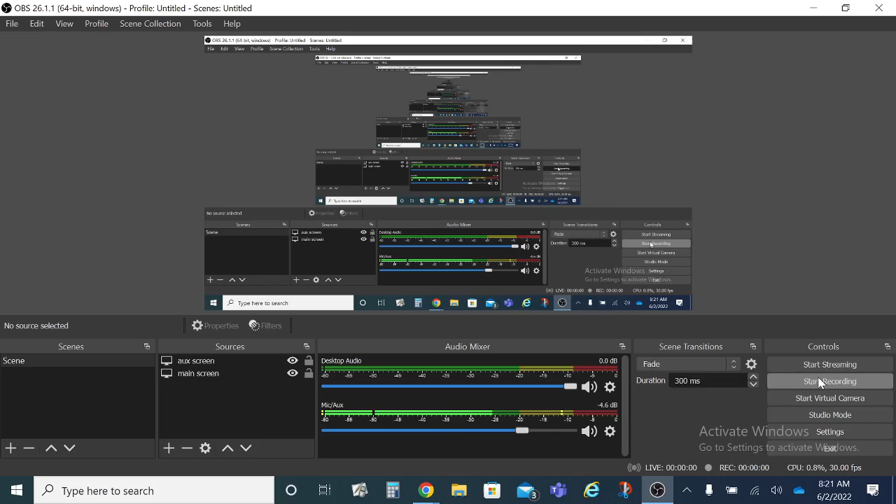All right, so what I'm going to do is first I want to talk to you guys a little bit about the actual caster, and I want to show you guys how to do a working drawing for it.

So let me just find our class, and what I'm going to do is I'm going to go ahead and create a document. I'm just going to call... well actually, let me cancel that because I actually do have a document already here.

All right, so what I'm going to do is I'm going to show you guys how to do the actual working drawing and how to make sure that you get the logo and all that stuff into it. First thing I'm going to do is I'm just going to obviously pick what I want. In this case, my drawing, is it in inches or is it in metric?

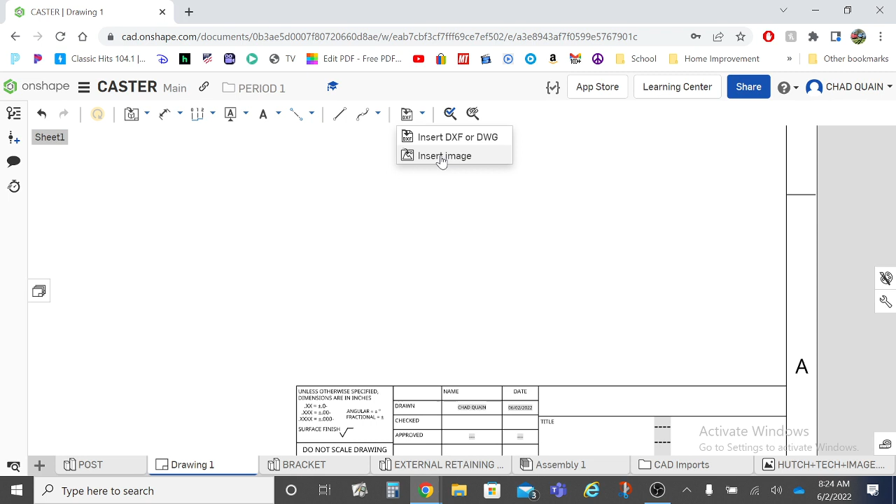From here, what I'm going to do is I'm going to show you guys how to put in your logo. So at the top of your screen, you're going to see where it says insert DXF or DWG, and there's a little drop down to it. The next thing that says is insert image. I'm going to click on insert image.

Now this only works if you see the Hutch Tech logo already imported into your drawing. If you don't, well then you got to go about it a whole different manner, and I'm not going to get into that. So you will see the Hutch Tech logo right here. I am going to go ahead and left click on it.

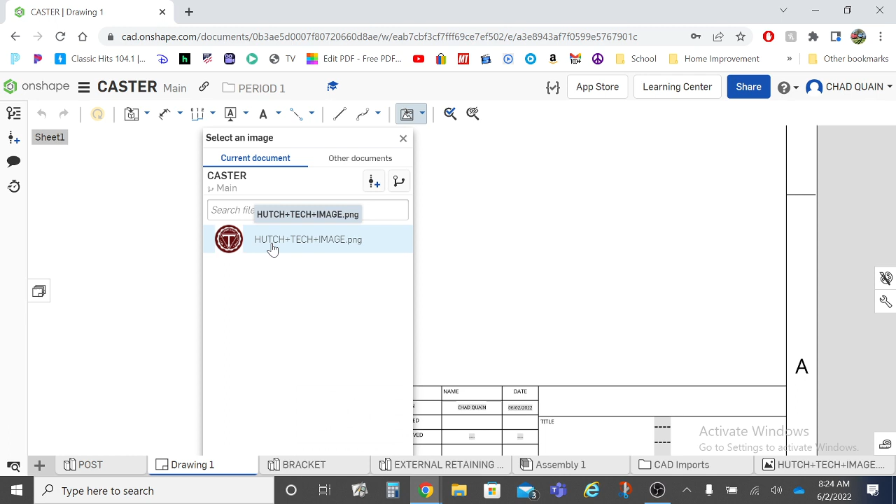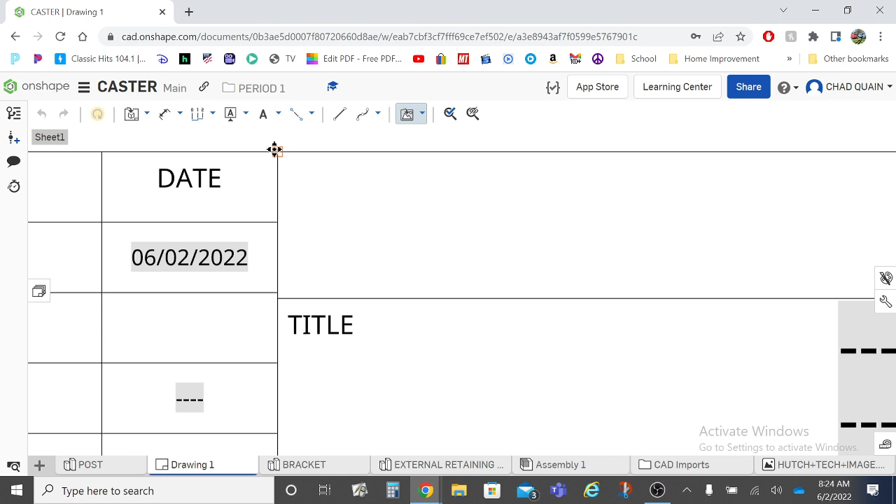The computer is now asking me to give it a start point. What I'm going to do is zoom in on this work area right here. I do not want to snap it to a corner. I want it inset a little bit. Left click one time, stretch your object out.

Don't let it snap to anything. It doesn't matter if it's centered right now. Left click again. You now have the object placed.

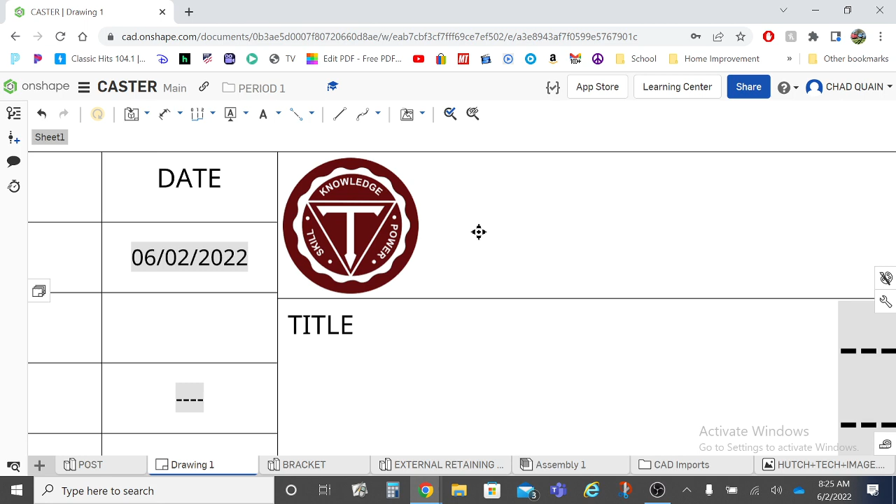All right, thank you. Now that you have your image imported, next thing that we're going to do is we're going to make a copy of it.

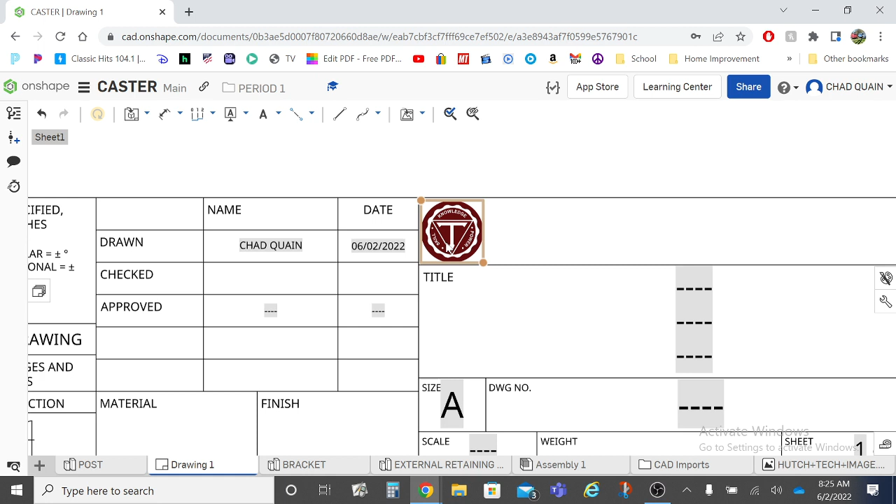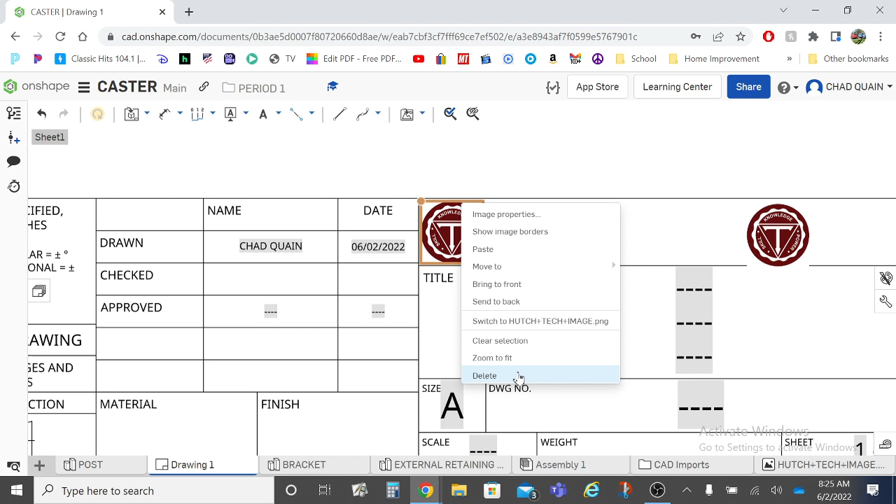Copying it is super easy, right click... actually, I lied. Copy it is Control C, Control V. I don't think it shows up as - we don't have a right click option to do a copy. We have right click to paste it, but I don't know why it doesn't show up as right click to copy it.

Once you have it copied, go ahead, we don't want both of them selected, we only want one of them selected. Place it over on the other side - you're just kind of eyeballing it, that's all you're doing. From here, you're going to place a note.

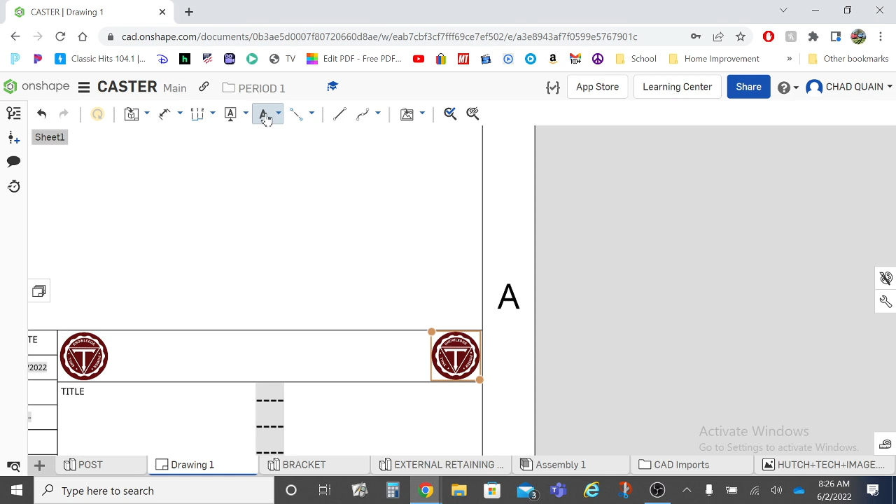That note is just going to be some text. Again, we don't want it to snap - if we can avoid it, we're going to try to avoid it. You're going to go ahead, type in Hutchinson Technical High School.

Before I do that, I'm going to go ahead and change the color to something that's more maroony. I don't know, we'll go with this color here. I guess this bottom one looks more maroony to me.

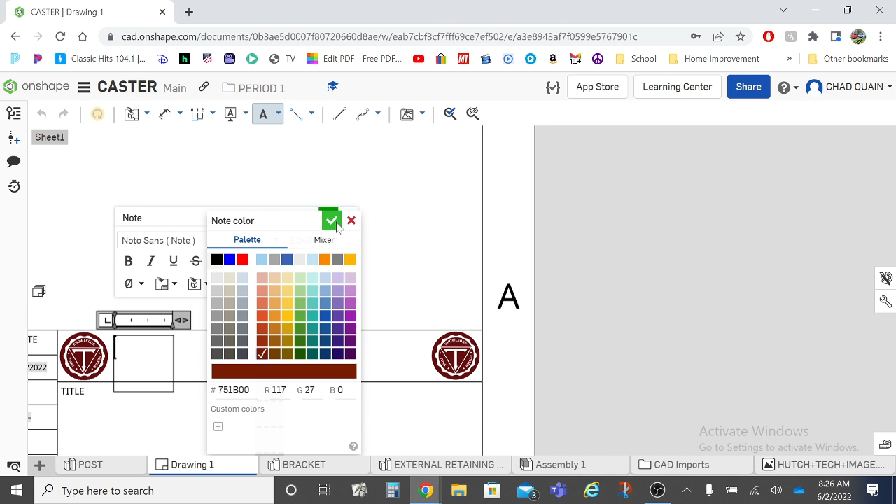I can then, in all capitals - you will notice that I've got a problem here that my text won't fit all the way across. Just go ahead, grab the push pull, stretch it out.

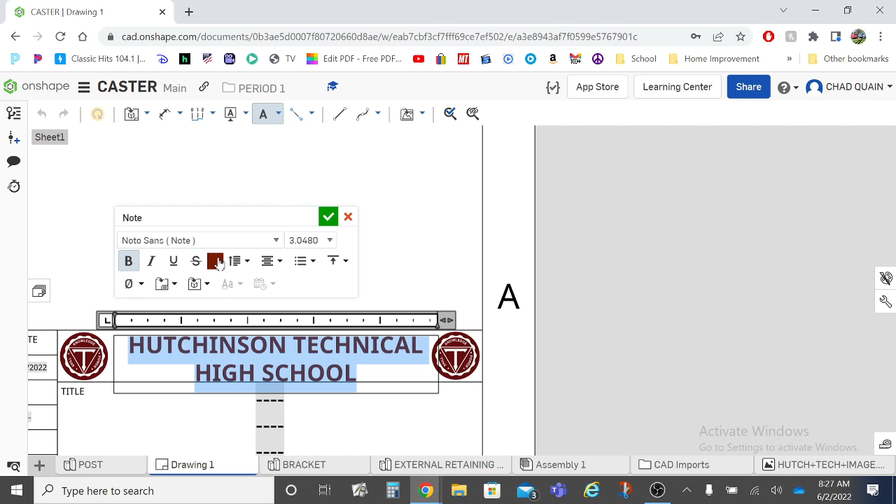Again, we center our text, so use the center tool. You can also make it bold if you'd like, but make sure that you select all of your text if you want to apply bold. If you want to change the font, you have to have it all selected. If you change the font to a different font and it does not fit into your title block, then and only then would you modify your actual text height.

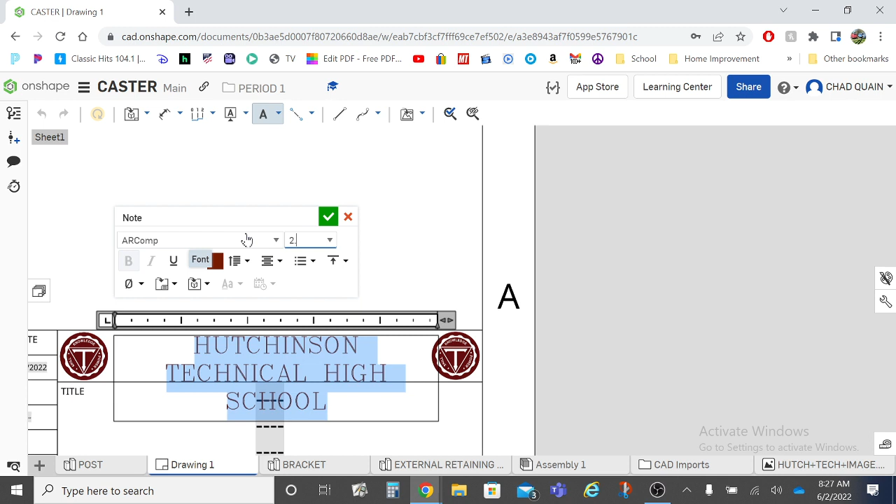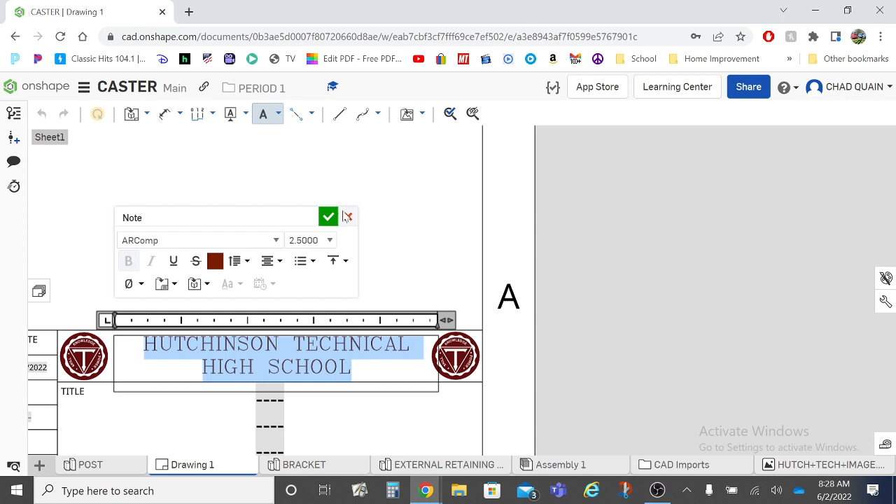Maybe I'd have to change this to like 2.5. There we go, 2.5 fits nicely. Could I mess around with it and make it bigger? Maybe. Could I mess around and make it smaller? Sure. Am I going to waste time doing it? Absolutely not. Does it really matter? No. Okay, green check mark it when you're all happy with it.

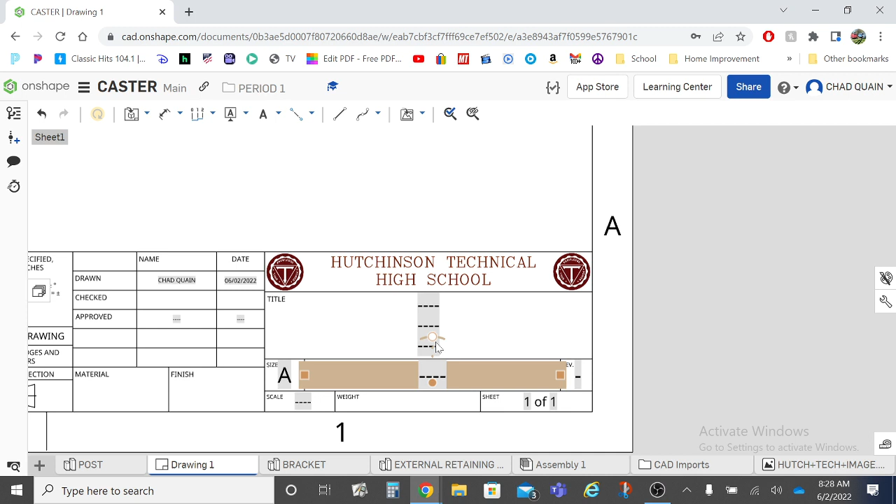Everything else in the title block. Putting the title in, make sure that you find the space that you want. Double click on that. Any of these other dashes that you don't need, simply select them and delete them. Will they show up in the final if they are left in there? No, they won't show up when you do a PDF, but is it annoying to look at?

Absolutely. Make sure you change your sheet numbers to represent what item you are working on of however many sheets there are. There are 6 sheets in total. So right off the bat, you're going to change this number from 1 of 1 to 1 of 6 or 2 of 6, whatever that number needs to be.

Scale. This should automatically be updated for you. If for some reason it doesn't automatically update, this is where you're going to change it.

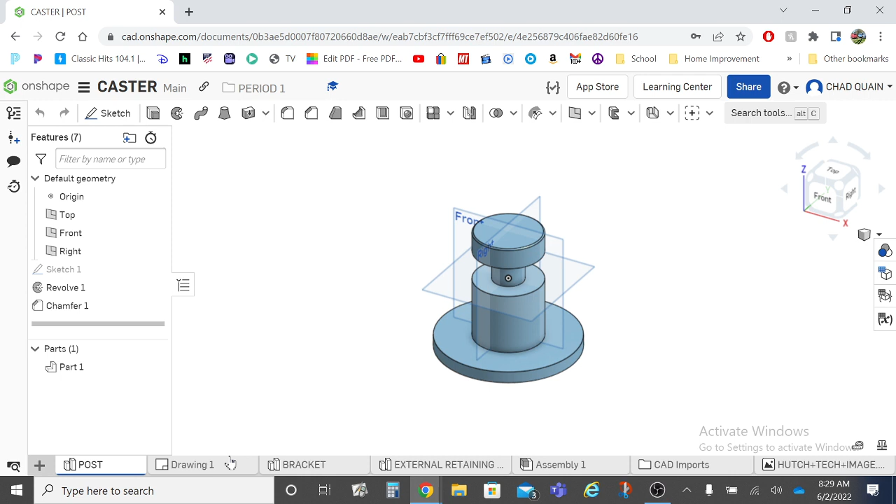The weight. This is something that I need you guys to fill out. You are going to be actually typing in what the weight of your object is. So if I look at, let's say, my post, what I would do is I'd select on my part, and then I'd come down to my display mass.

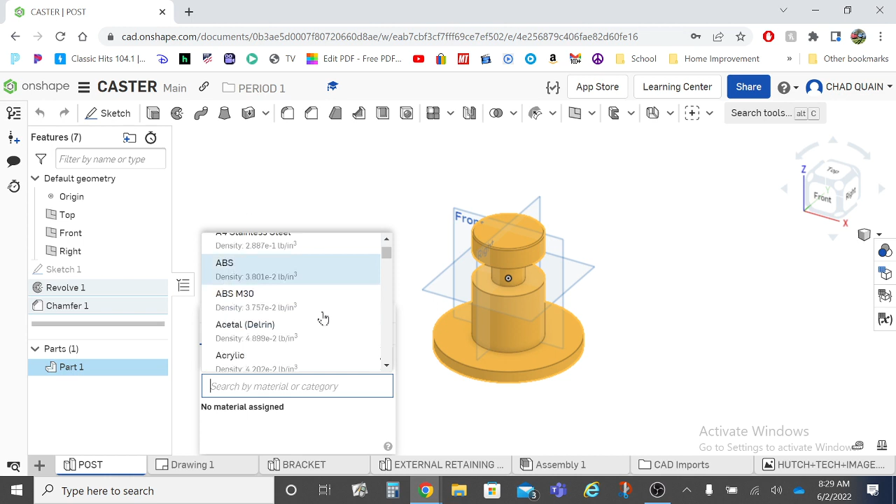I need to make sure that I actually have an item selected for it. In this case, I don't have anything selected, so I have to come back in here, do my right click, assign material, and then I think it was cold rolled or cast? I don't know, what is it? Steel? Anybody? Carbon steel, is that what it was? No, if it's not, that's what I'm going to use for this demo.

Come back to my weights, and then I will see where it says what my mass is. Make sure that you follow the instructions. If the mass is supposed to be in ounces, make sure you come up to your hamburger workspace units and you change it so that it represents the proper units. If it's supposed to be ounces, kilograms, grams, whatever it's supposed to be, make sure you change that. It tells you in the instructions what it's supposed to be.

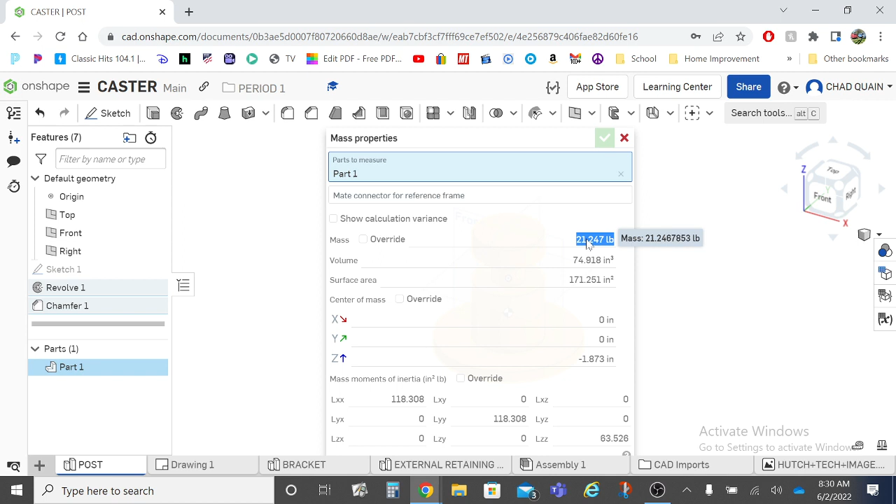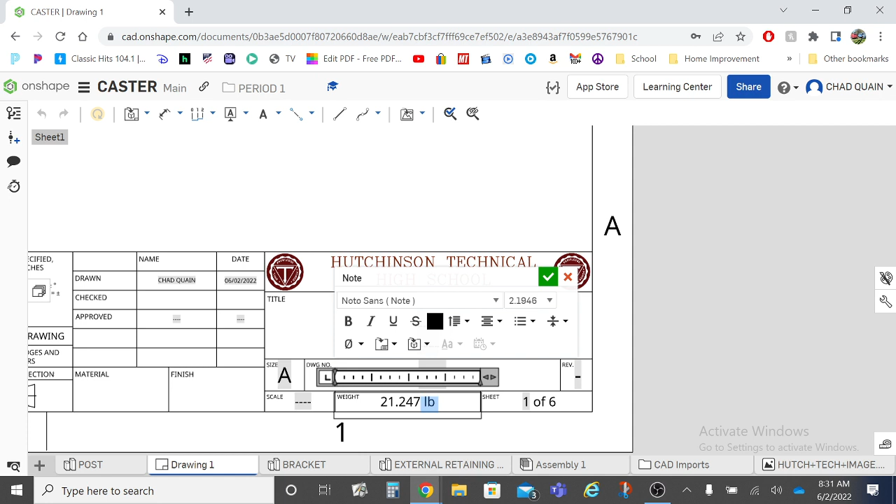You could then simply just copy and paste. Control C, come over to my working drawing, come over here, double click, Control V. There it is. This also would be the same thing that you would go ahead and type into your mass calculations quiz. The only thing is I don't want you to include the space or the units because it's already indicated on the quiz. I only want the raw number value, 3 digits, or 3 decimal places, okay?

Material is told to you in the actual working drawings or the detail drawings. So if I come over to my detail drawing here and I look at, I don't know, I'll just pick one of them randomly. You can see it says carbon steel, it says powder coat, and then it has a powder coat color to it. Sometimes it will say that it is polished, sometimes it will say that it is raw, whatever it is, make sure you fill that out.

The information that you see in the title block is basically what I want to see on your final project. If you're missing something, well, then that's going to be points off. If I miss something on here, let's say I miss a crucial dimension.

If I don't have it on here, guess what? I'm not going to take off on it for your project. I know on one of the objects I have it where I believe I missed a chamfer, so I'm not going to take off for that. But if you come up to me and ask where's that chamfer, I'll tell you it's on page 2 of the project. That being said, this is all the information you would need for your title block.

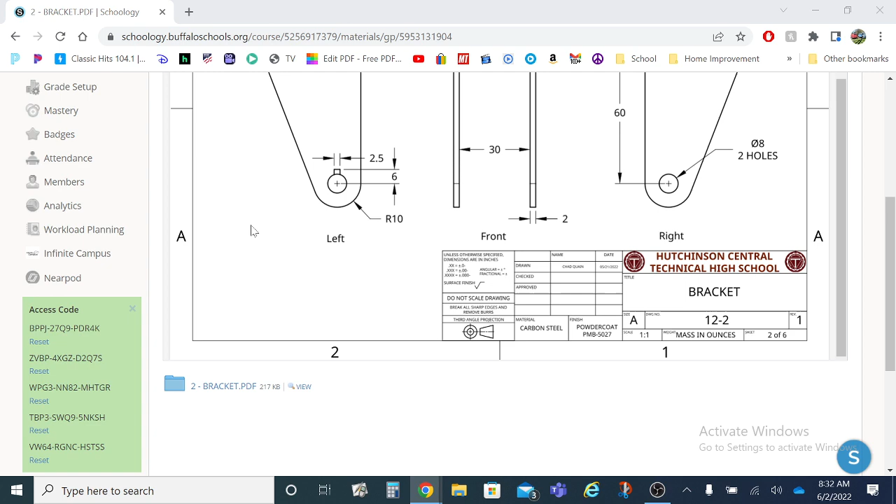Next, moving forward, I'm going to go ahead and use the insert view, pick an object that I want to work off of. I'm going to use the bracket. So I'm just going to go ahead and pick bracket, place the bracket, and place the multiple views of it.

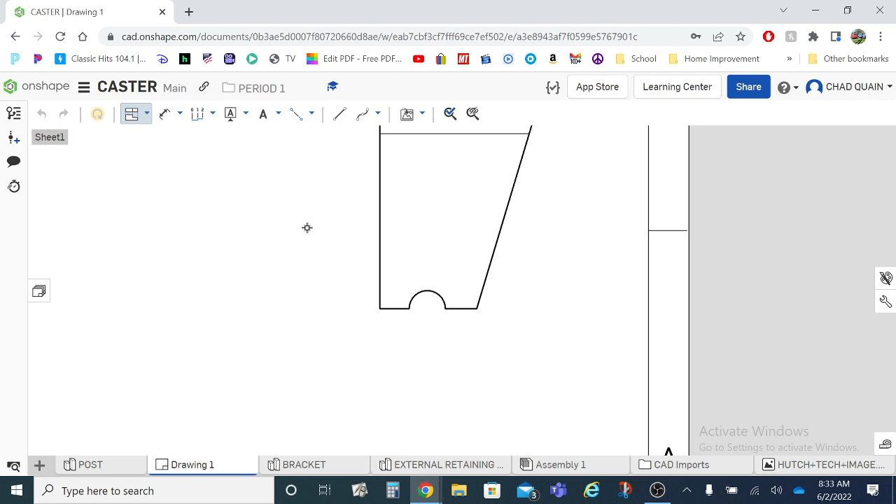Obviously, you can see my bracket is not complete, but it gives you the idea as to what you need to do to it. You will notice there is no information written underneath my bracket, meaning it doesn't tell you what the front view is, the side view, or anything like that. If I right-click while having my object selected...

I can go View Properties. I can then click on the View Label. I can also go ahead and click Scale Label, and it'll tell me what the scale is. Again, information that you see on the worksheets, you also need to have that.

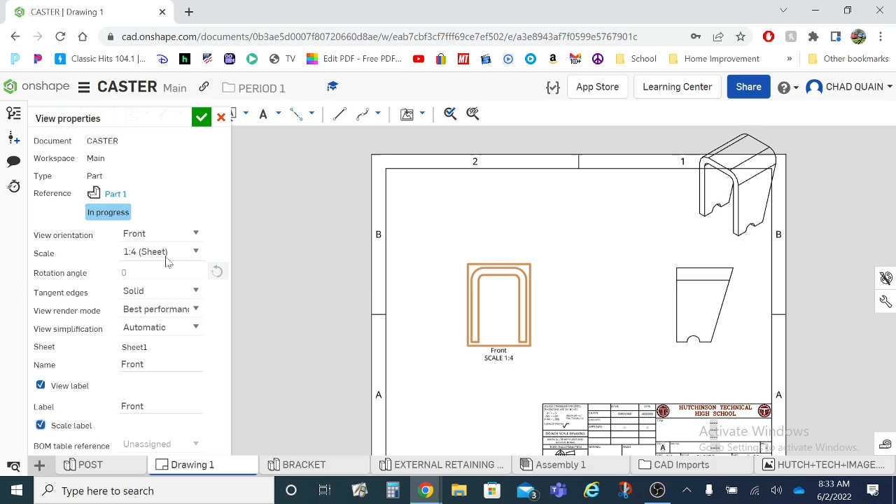If I need to change the size of the drawing, I can change the size of the drawing. I'm just going to put it 1:1. I don't know if that's the right scale. Clearly, it's not going to fit on here, so I'm just going to go back to that 1:4 for now.

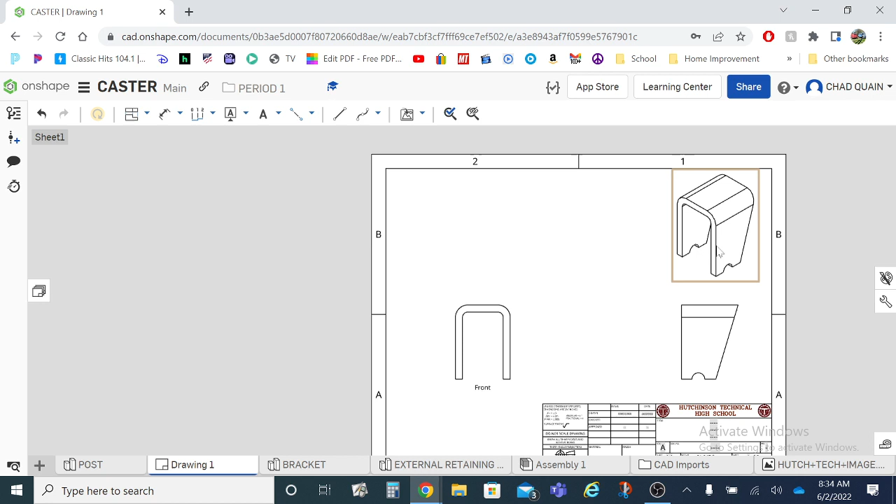What I want to show you here next is your isometric drawings. They're a different size. I'm going to show you another way to get into the properties. You can just simply left-click, double-click quickly on your object. Brings you into the same thing again.

I am going to change that scale so that it represents whatever it says on my drawing. Notice it says scale 1:6. If it meets what you need it to be, go ahead and right-click on it.

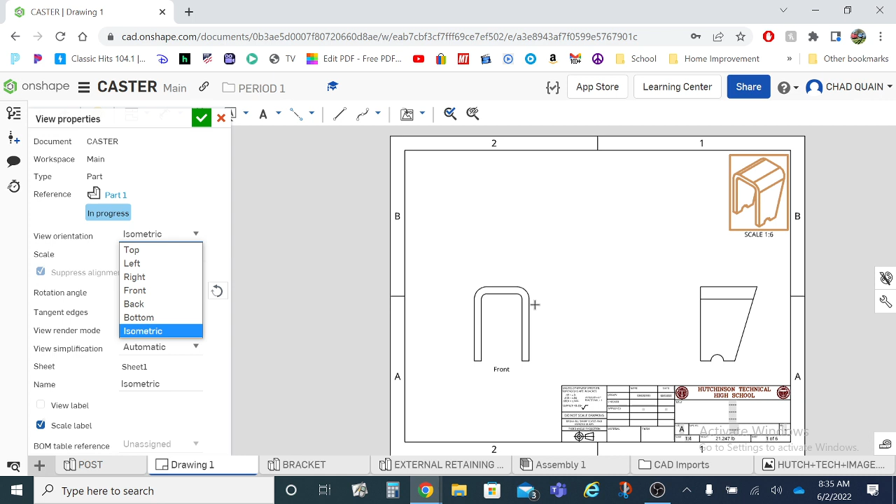Sometimes your isometric drawing might be in the wrong orientation. You can double-click on it, and you can actually go ahead and change the view. Or sometimes this view might be the wrong view. So you can modify those couple things there. So those are a lot of the little things.

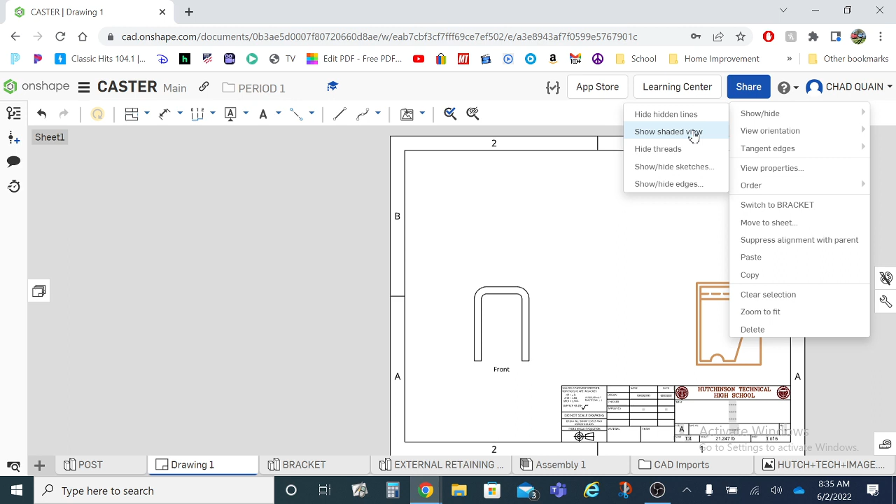If you need to show or hide hidden lines or center lines on an object, let me show you how to do that. You're going to right-click on the object, you're going to have Show Hide, very top. And then you can go Hide Hidden Lines. Right-click again, Show, and then there would be center lines if we actually had center lines to work off of.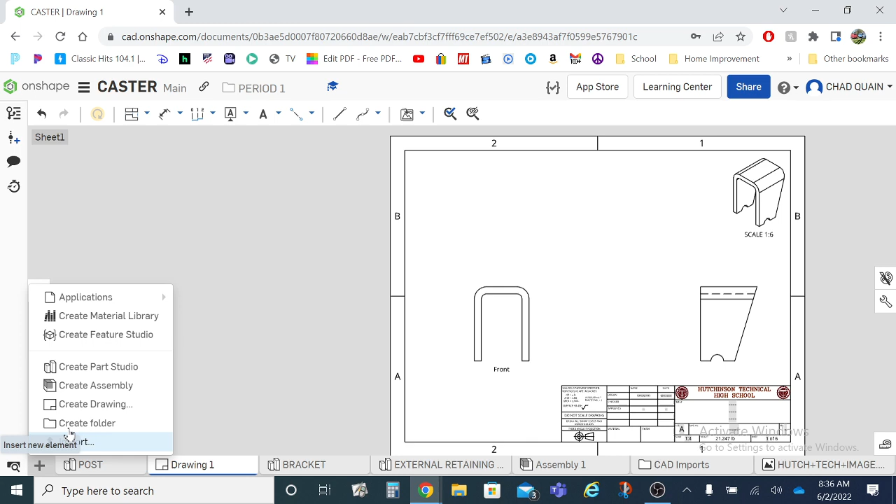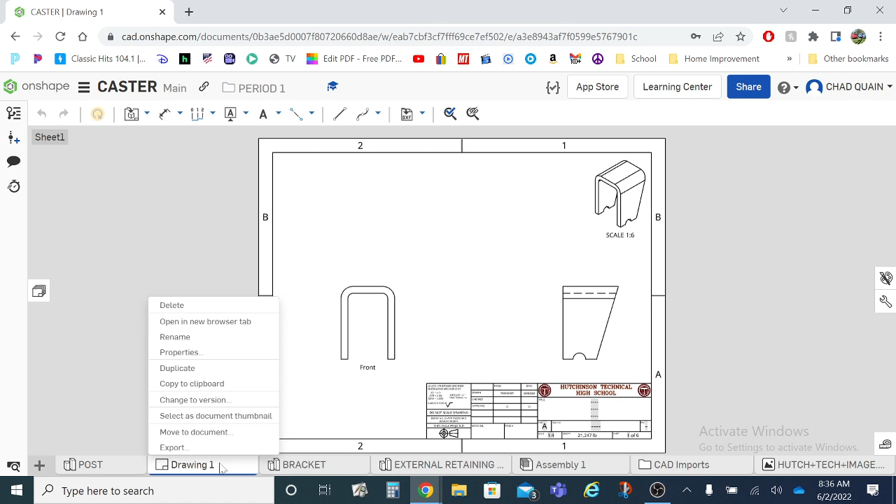If you need, on one of the projects, there is - let me bring it in here, I think it's the wheel. Let me create a new working drawing here. Actually, let me do it the right way, the way that you guys would do it, because you're not going to go through all the extra work again. What I'm going to do is make an exact copy of this drawing, so I would just right-click and then go duplicate. Now I have the title block pretty much already set for me.

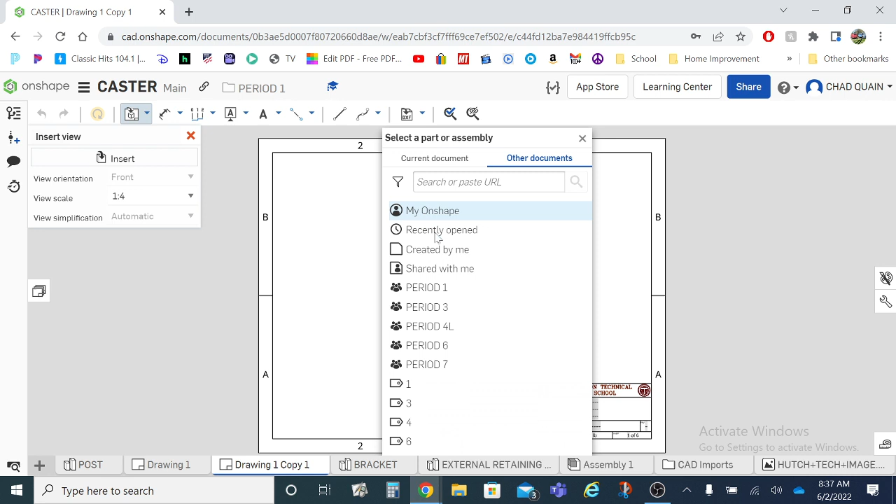I'm going to just delete all these views because I'm going to import something else. Insert view, I'm going to pick my object, other documents. Let's see here. Let me just find... I don't know, actually have to find the right drawing for us. I don't know if I have anything in here. Well, I don't have the wheel drawn, but I'll just use the post again as my example.

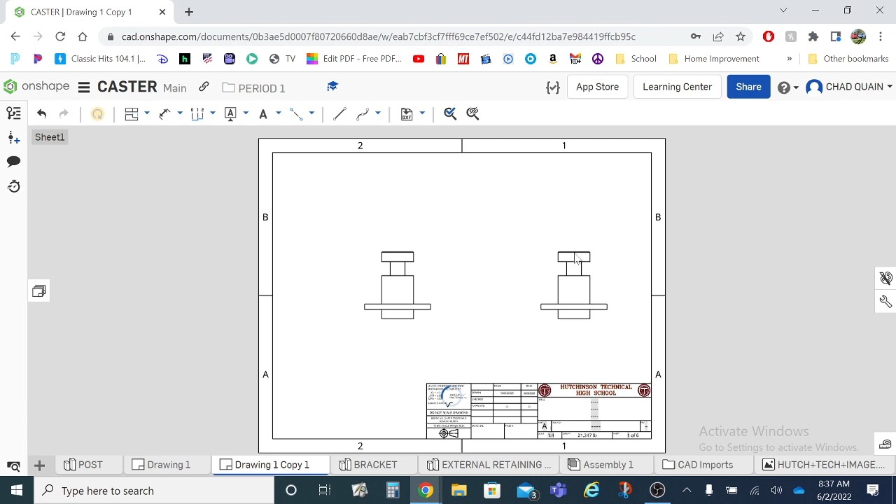In the wheel, one thing that you need to do is create a section view. So let me bring this up and we can look at the wheel itself.

This view right here is a section view. Basically, it's where I take the object and cut it at a given location. This is important because normally we'd place a view and then create a right side view of it. Well, this time I'm going to do something different. I'm actually going to create a section view, and I'll show you how to do that.

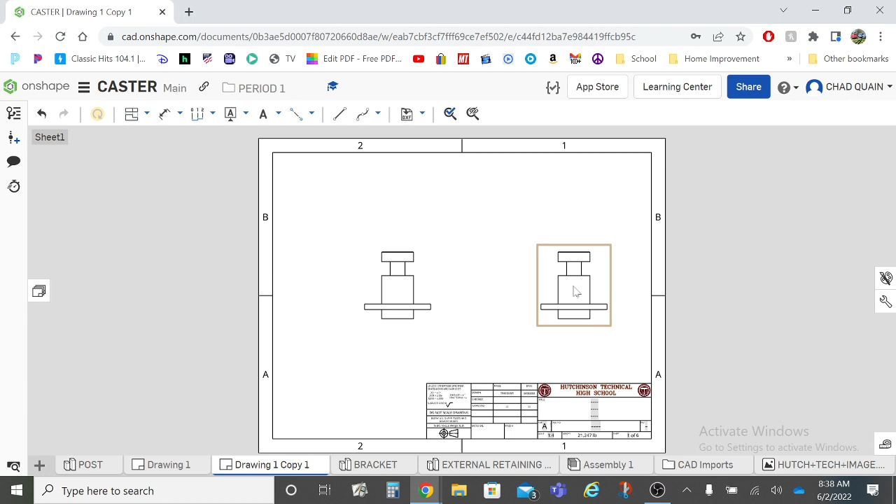And then you'll notice I have a detailed view of that section view. So I've gone ahead, here's my front view, here's my right side view. In this case both my objects look the same, but I'm going to take my right side view, select it, and just simply delete it. I don't want it.

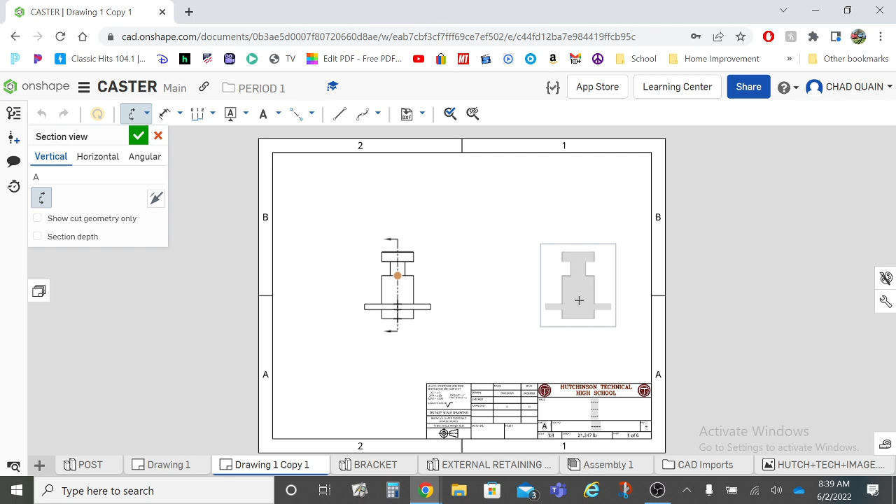What I'm going to do now is come up to where it would be projected view, drop down to section view. Then all I'm going to do is pick the center of my actual project, and then I don't do anything more other than slide over to the side. You'll notice that I now get what we call hatching, at a 45-degree angle. It just represents where the object has been cut.

If I need to do a detail view, I come down to the same place I was before, detail view, and then I can pick my location, draw the circle, and then place the object.

If I need to do anything like a footnote—let's say I know on one of my drawings I need to indicate what the chamfer is on an object—well, there's really no good way to actually write that in. So what I can do is create an arrow. I'm in the notes command, remember how I told you before, click once and notes will come up with text? This time I clicked one time and then dragged off to a direction. Now you're going to see where I can put some text in. In this case, let's say I do 1 by, and I need to do 45 degree. I have underneath where it's got the diameter symbol, I can do the degree symbol. And then I can write chamfer.

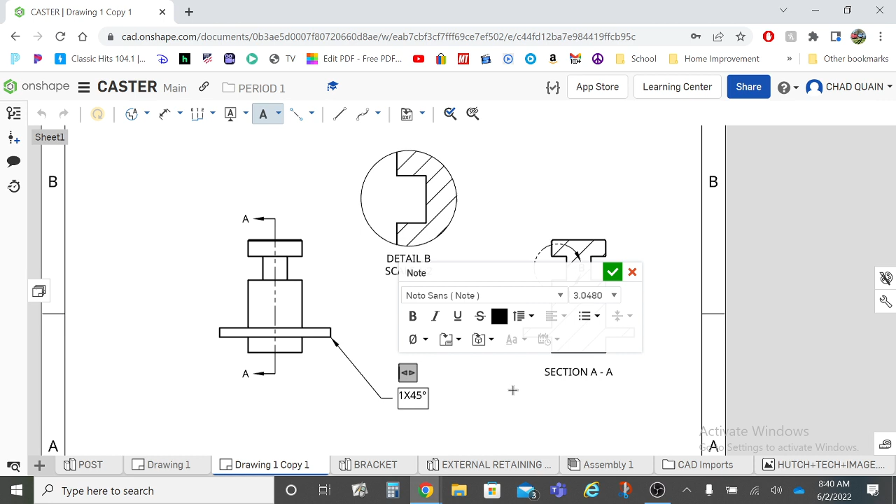Again, if you need to stretch it, you can always just grab the box and stretch it.

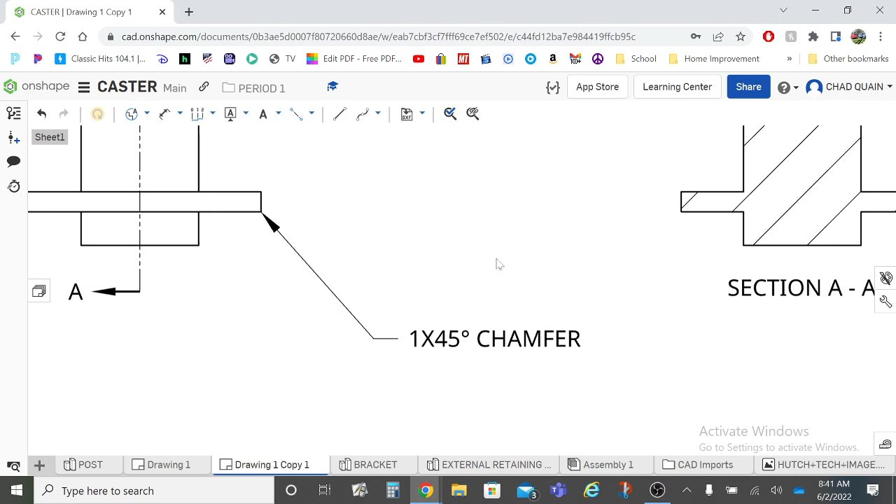Hey, guys. Anaya, pay attention. At least you're honest. All right.

Most everything else I've shown you how to do for the working drawings. If you need to omit on that wheel...

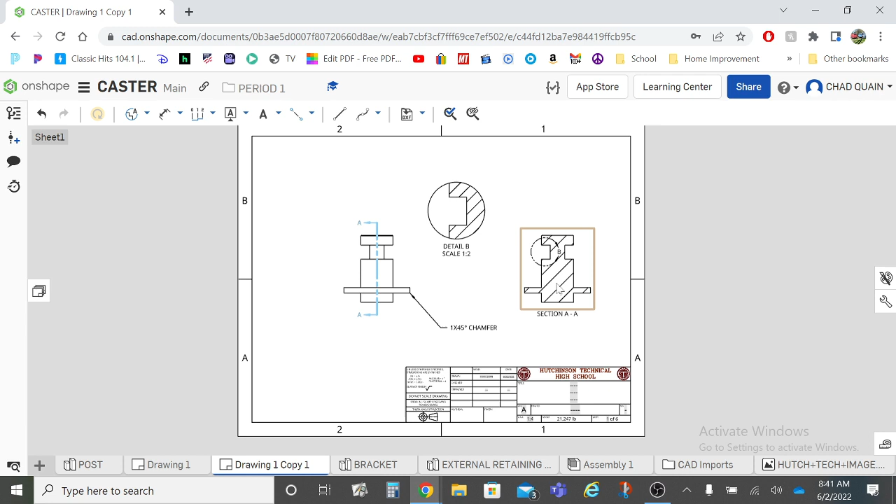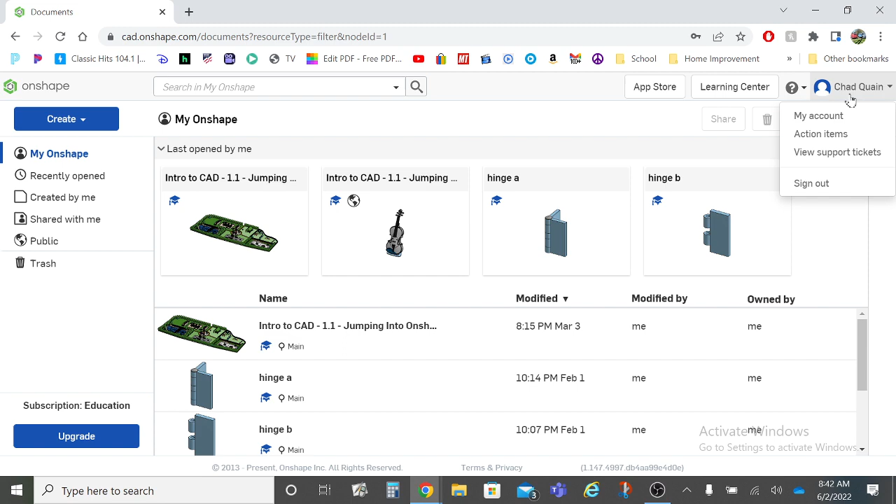Let me close this out for a second, and let me see if it's in this account or if it's in my other account. I don't think it's in this account. Let's try signing out of this one and signing into my other account. Nope, it's not here either. I don't know where it is. Sign out, sign back in. Oh. All right. I have no idea why. Okay, oh Zach, I'm in your project here. All right.

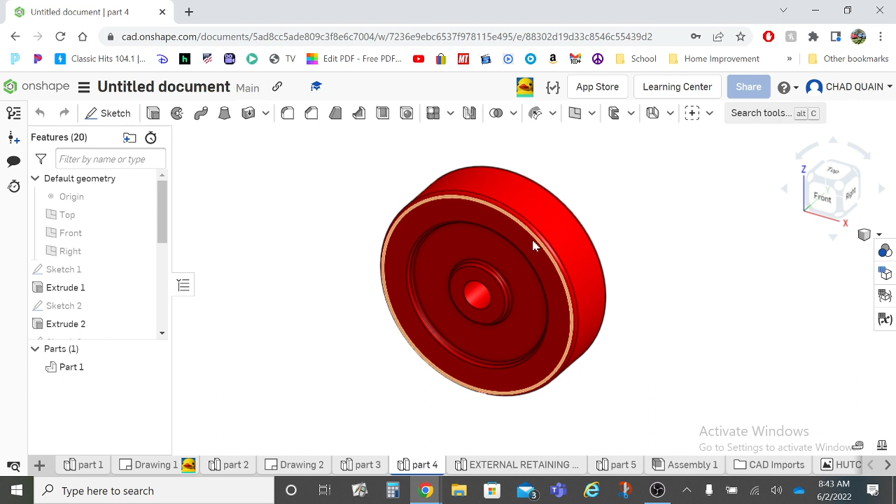All right, eyeballs up here again, take a look at this. My wheel—one of the things I needed to do to my wheel in my working drawing was make sure the object did not have a lot of extra information. Meaning when I put a fillet in an object, I have a start point, what I'd call an original corner, and then another end point. What I can do is in my working drawings...

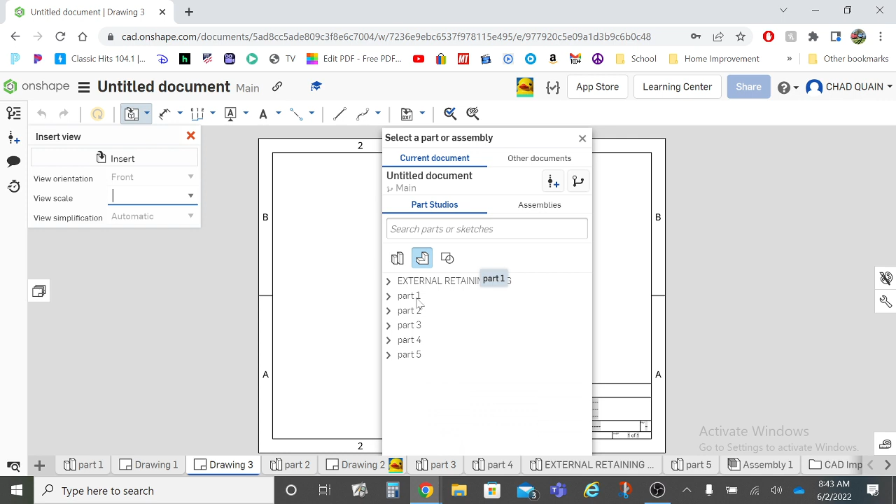Let's see here, I'm just going to create a working drawing here. Oh Zach, you need to go through and label all your parts.

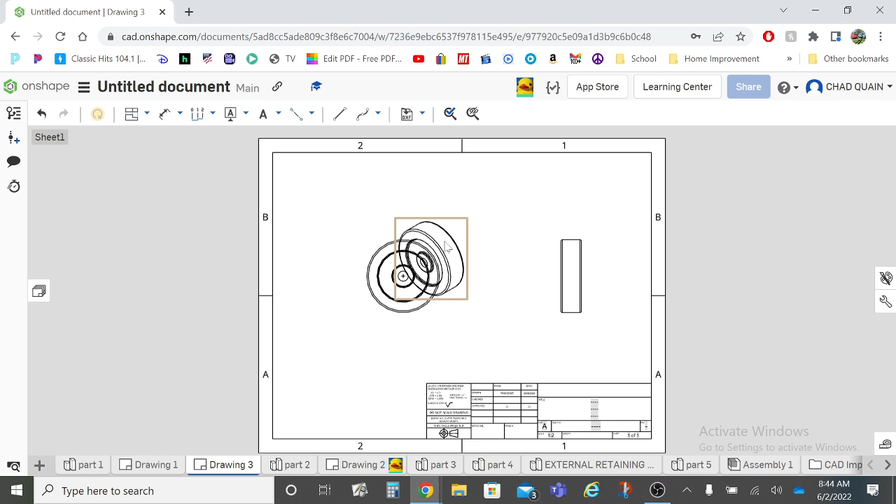All right. Seriously?

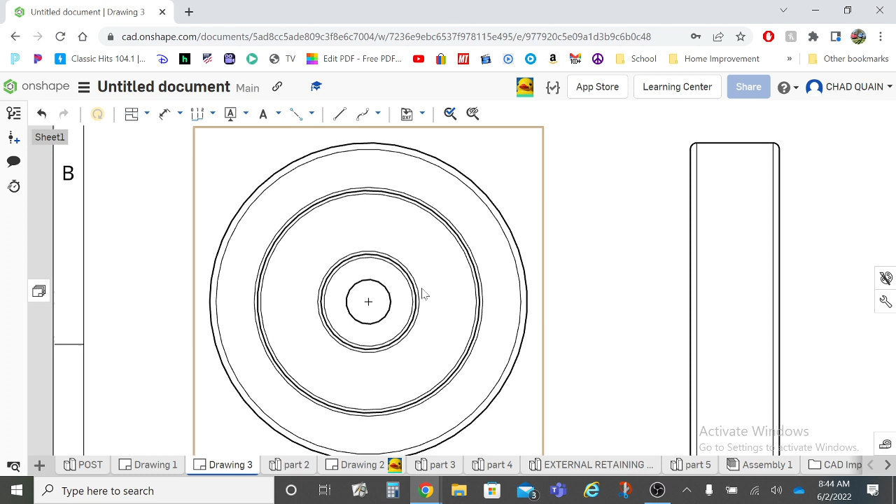All right, so if you take a look at this object, you'll notice I've got a lot of extra stuff. What I can do if I want to get rid of all that extra stuff is go to tangent edges and tell it to be hidden, and that just simplifies the drawing. If you need more information on how to do that, it's written out in the instructions. Okay.

One thing I do want to show you guys is, not how to lose your drawing, but how to take and project an item and have it so that there's color to it.

Okay, this time I need to scale that object way down. What am I doing here? Ah. All right, I'm going to scale this thing so it's super tiny. And what I can do is... I forgot how I add color to it. Holy brain fart.

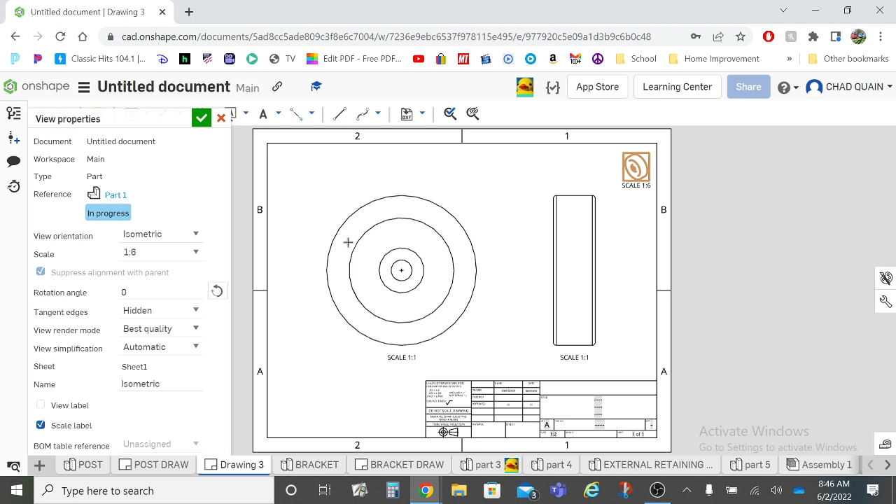Change appearance over here. All right, let me see if I can do that. Right click here. View show, shaded view. Maybe that's it. Right click, show shaded view. I bet. Yep, there it is. Okay, thanks guys.

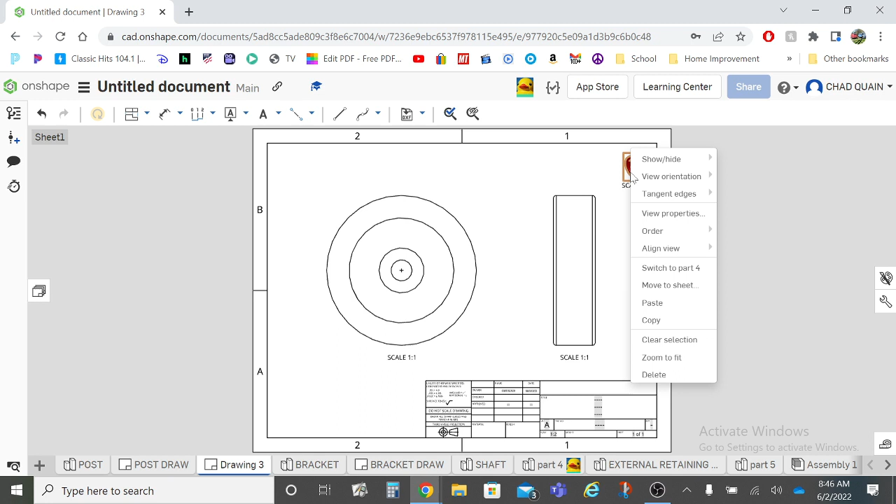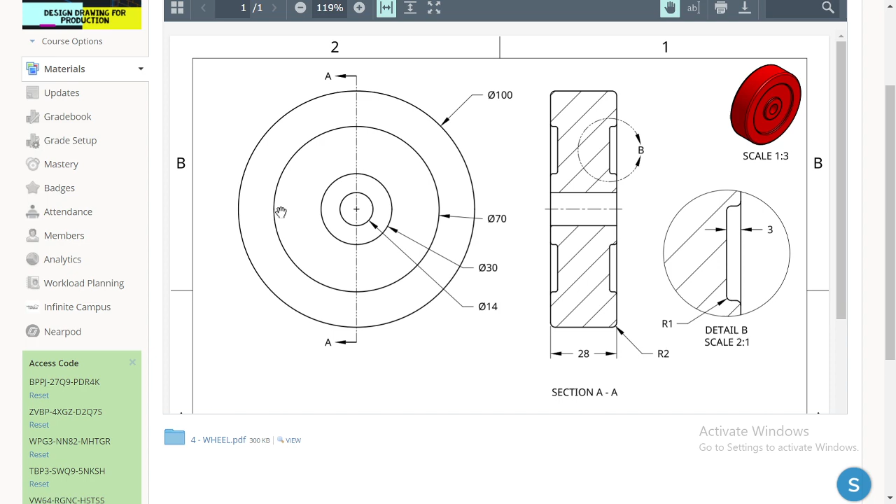All right, so again, right click, show shaded view. That'll bring it into a color object. That's pretty much it for this. If you need to show center lines, you can right click, show hide, and then you'll have center marks. In this case, they're already hidden, but sometimes you'll need to show those. That's kind of it for this.

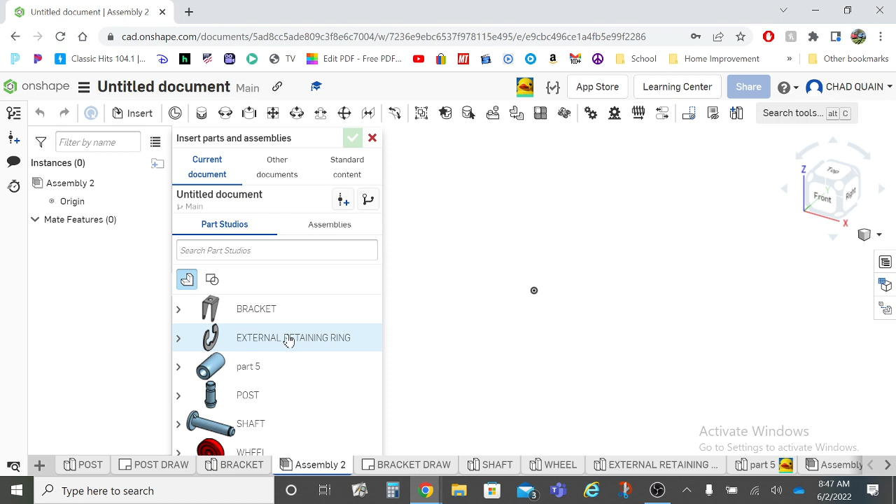Next thing I want to do is just go through and show you the assembly. I'll do a couple parts of it quickly. I'm going to click insert, and what I'm going to do is just bring in all of my parts. I don't really care how they stack or where they sit.

1, 2, 3, 4, 5, 6. I got all 6 parts. Here they are, they're all stacked on top of each other. If you want to move them around, go ahead and left click on them and move them around.

Now, if the orientation of your objects is incorrect, meaning this piece and this piece are in the wrong direction, a couple things I can do. Let's say I want to just change the orientation of my wheel itself. Click on it one time. You're going to see what I would call the rotation UCS show up. If you look at these little icons here, they tell you which direction your object is going to be rotated. If I select this one here, it's going to spin about this axis, turning it. Well, guess what, it doesn't do anything for us, so we're not going to use that one.

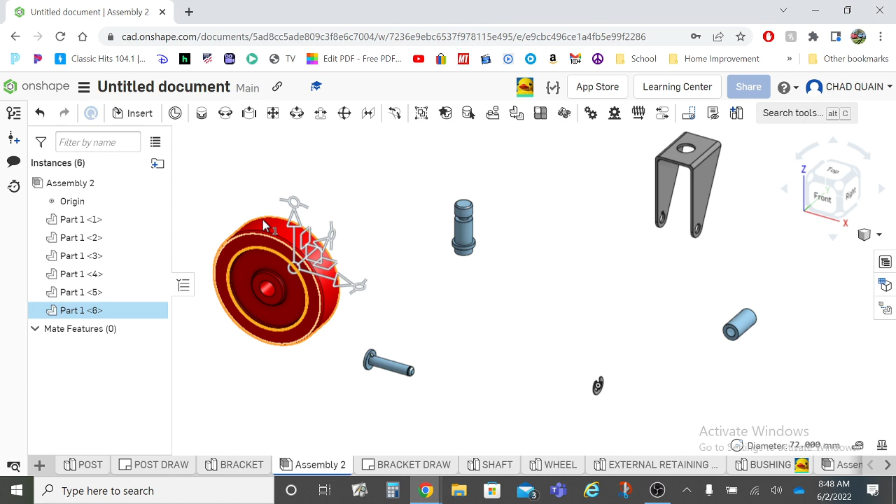If I use this back arrow, it's going to flip-flop the front and back side of my objects. And then lastly, we can use this one here and rotate the object. Now, every time you do a rotation, it's always going to be based off of 90 degrees. All right, so I've rotated 90 degrees. Now I know it's going to fit a little bit better. It just saves you in the long run.

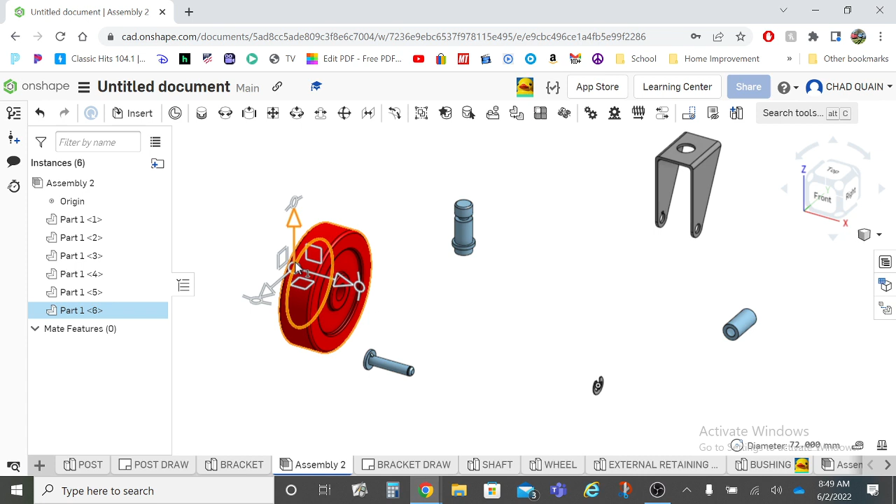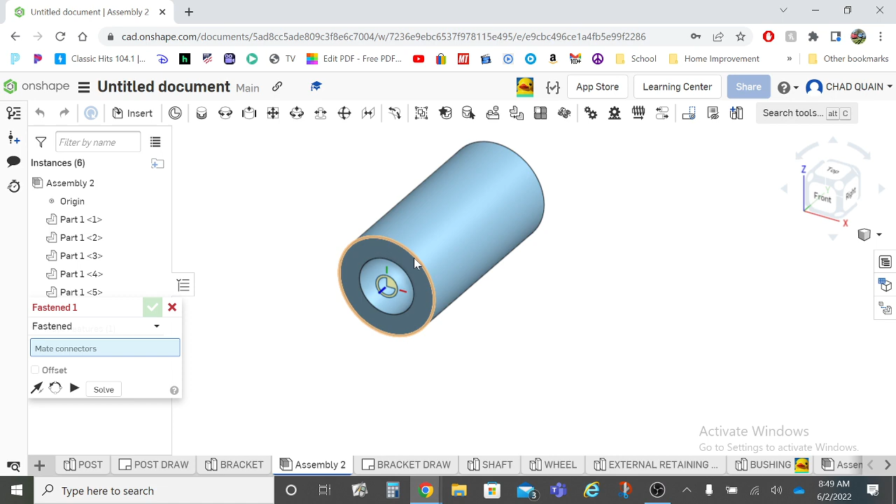Now, if you mate a couple of items together, what I'm going to do is use the Fasten Mate tool. I'm going to select my very front face. You'll notice the little widget that shows up to tell you, hey, this is the face I'm working off of, this is the orientation that's going to be. I'm going to select one of my circles here, and come over to my wheel itself, and I'm going to pick the same hole, and I want the widget to be kind of in the same spot. Left click it again.

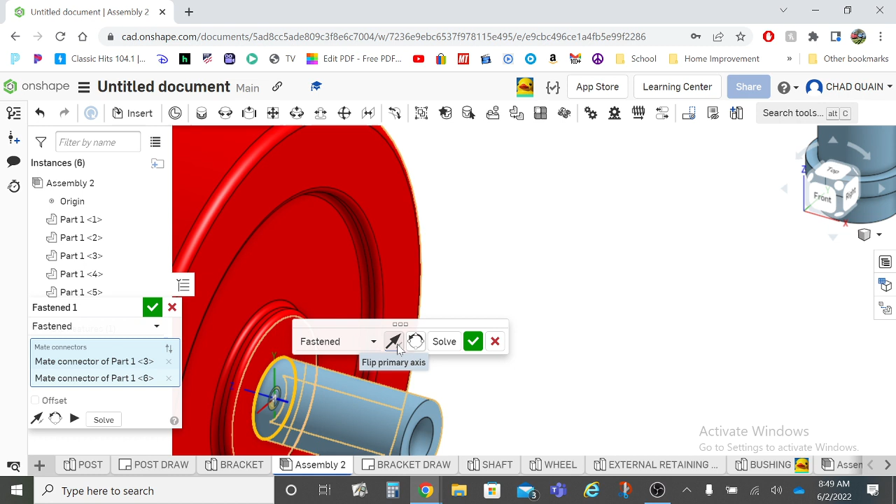You're going to notice, hey, it lined it up in the right location, but it is not in the correct direction. I can use flip-flop. Flip-flop it, go ahead, green check mark it. That part looks good. Please do not hesitate to rotate your object to make sure that it is fitting into the components correctly.

One thing that I do want to go through and talk to you guys about is after you do a couple items, select those couple of items. Get out of the tool or the command. Select those 2 items and use group.

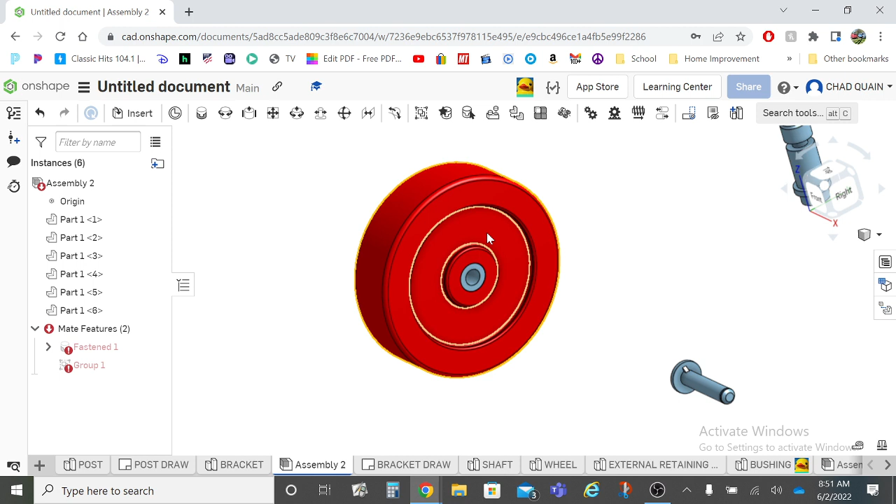Now, it's going to get mad at you and it's going to put the groups as red over here. We don't care about that. We care that when I move this object, or when I go to add another fasten to it, that they stay together. Occasionally, what will happen is when you go to apply a group, or a fasten mate, sometimes the objects will move. I don't know why they move, but sometimes they just move on you. So just grouping them is a nice little thing to do.

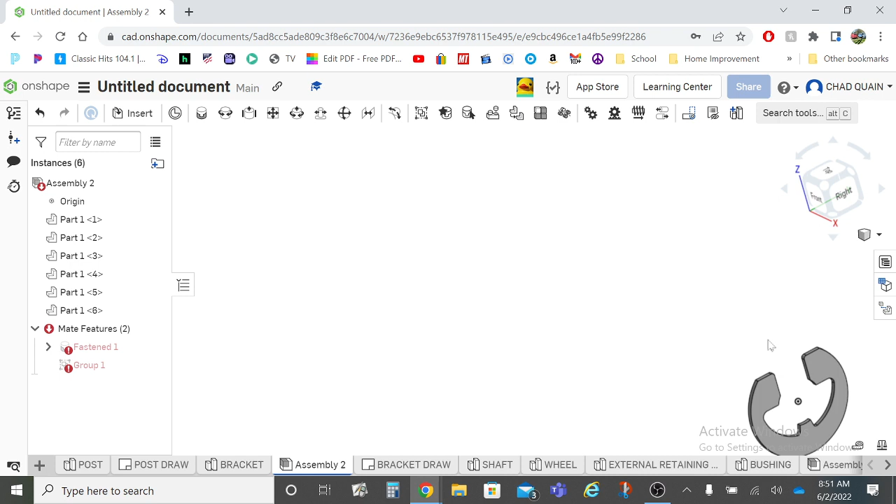One last thing I want to talk to you guys about is putting this external retaining ring. I want you to get it so that it snaps onto the correct location. Super easy to do.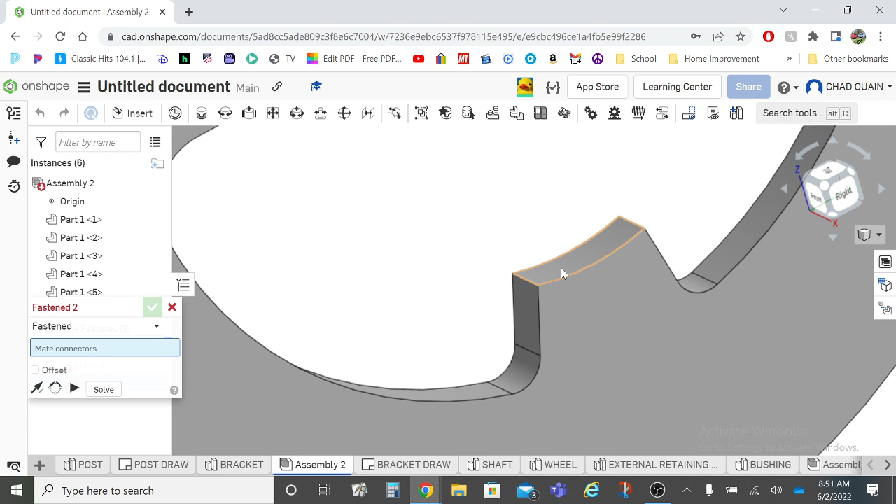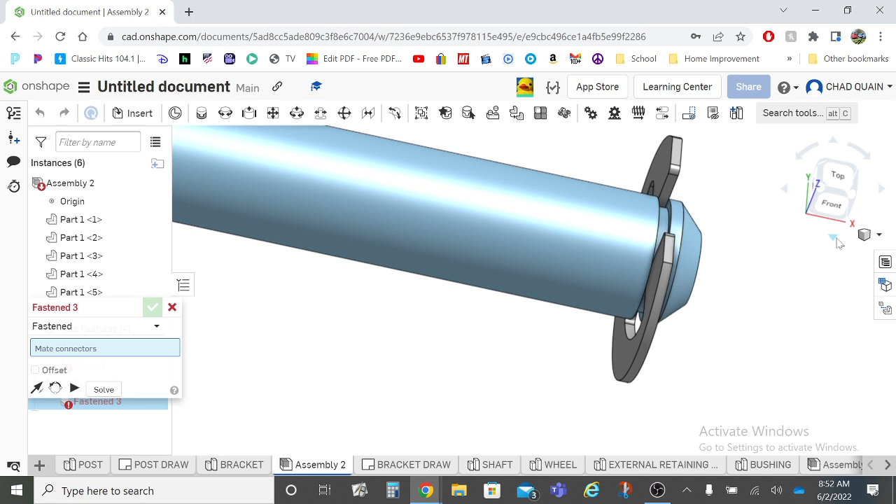First thing I'm going to do is use fasten again. I'm going to pick this curved surface right here, this entire curved surface, select that. Come over to my shaft, again pick the exact same curved surface, and it will fit the first time correctly.

Obviously you want to do these two processes, the snapping of this external ring and the shaft, as your very last operation. Try to do the entire project as you would assemble it. Like I would put the bushing into the wheel, and then I'd take the wheel and put it into this bracket.

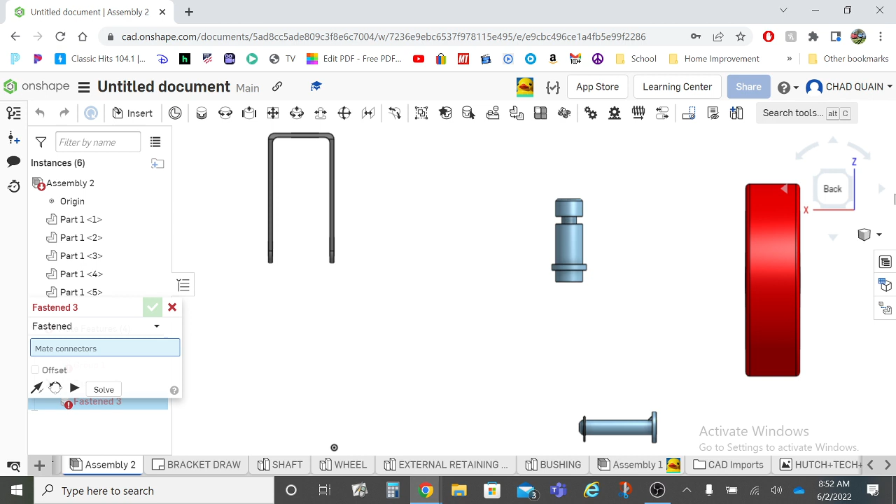When you put the wheel into the bracket, a couple things I want you to pay attention to. First, this wheel is only 28 millimeters wide. The bracket is 30, so that means you have to use an offset. So if I pick this face, and then I pick this circle as my center point, and I pick making sure that it's this face.

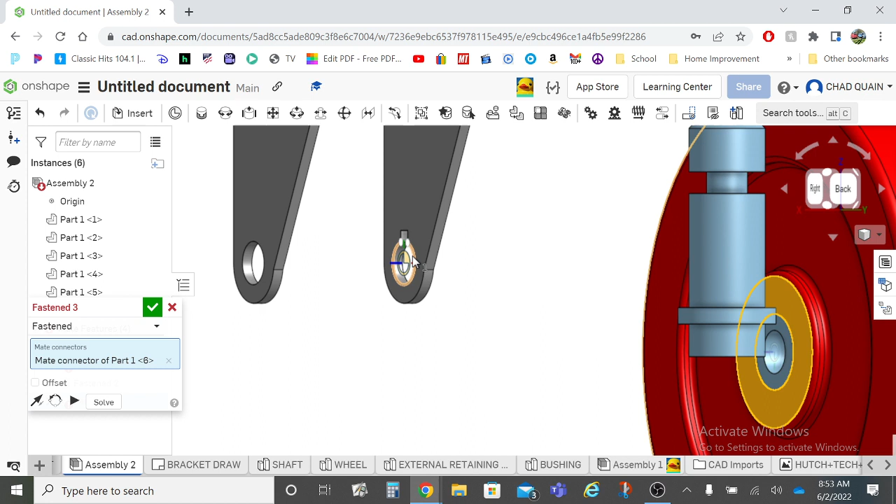Ryan, you also have something going on right here that's not correct. You'll notice right now my wheel's facing the wrong way. Do flip-flop to it. I'm going to go ahead and look at it directly like this. Do you see how there is a dead space right here and my wheel's jammed up tight against this other side? We don't want that.

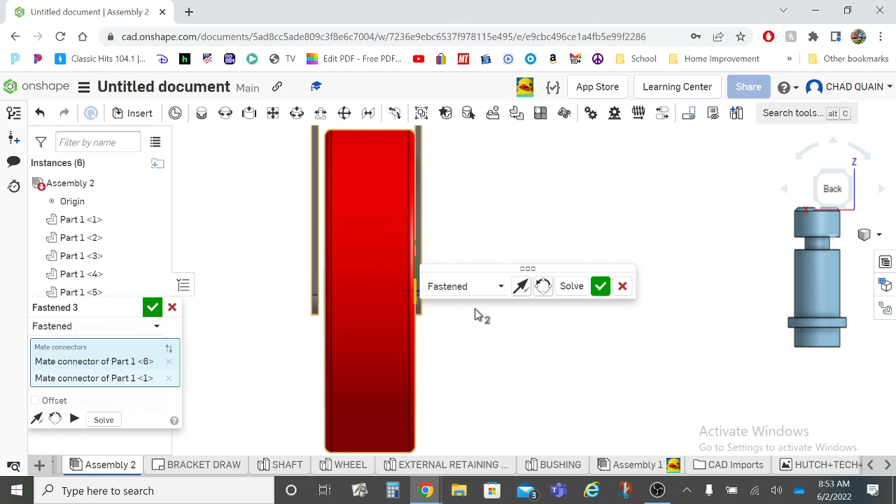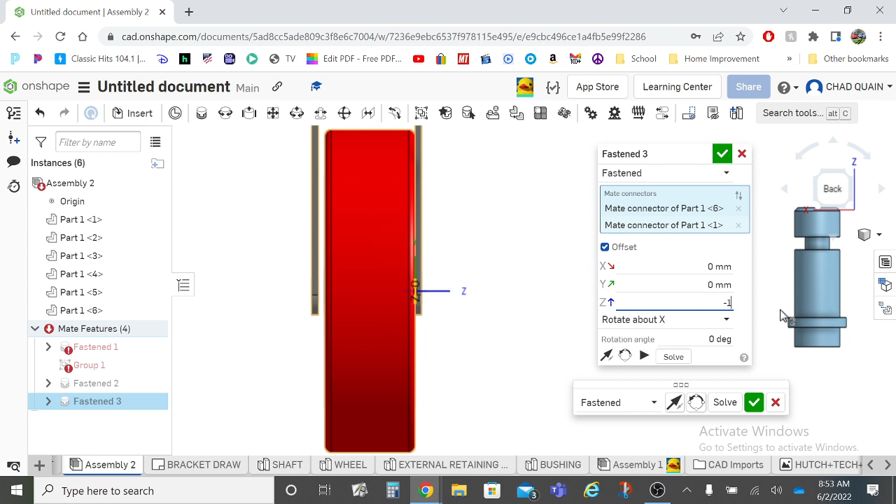So what I can do is where it says fasten, I'm going to use offset. Here's my Z-axis, I come over here, use my Z. If I want to move the object to the right, I will use a positive number. If I want to move my object to the left, I use a negative number. In this case, 30 minus 28 is going to be 2. I divide that in half, it gives me 1, so I'm just going to do a negative 1. And then now my object is perfectly centered.

What should I do to this object now that I've done a lot to it? Group it. Green check mark it. Again it's going to show up as red over here. I don't really care, all I care is that my object stays together.

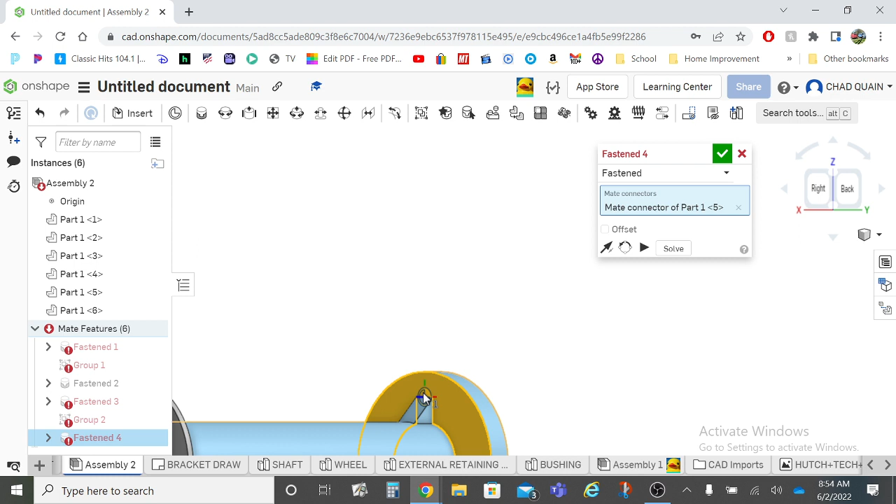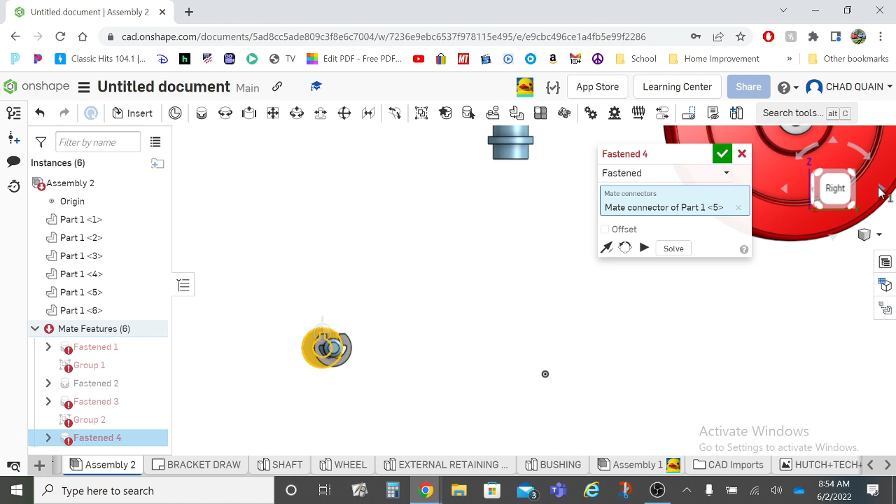Now, one of the other things you're going to do is get it so that this face, I will just simply pick that face, and that top corner or top midpoint of my rib is aligned. And then I'm going to find the side that has my rib.

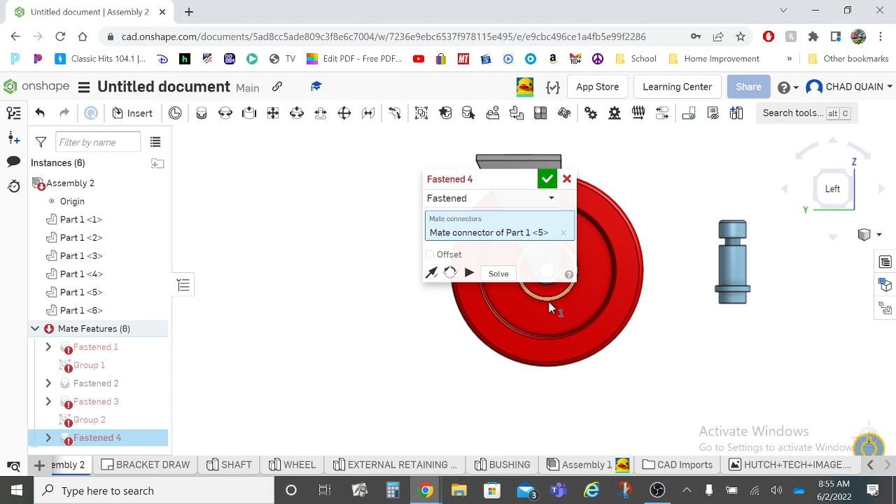I'm going to find that same location. Hopefully you've done all your dimensions correctly. Mine doesn't look like it decided to do it right. Again you might have to rotate, you might have to fiddle with your project a little bit.

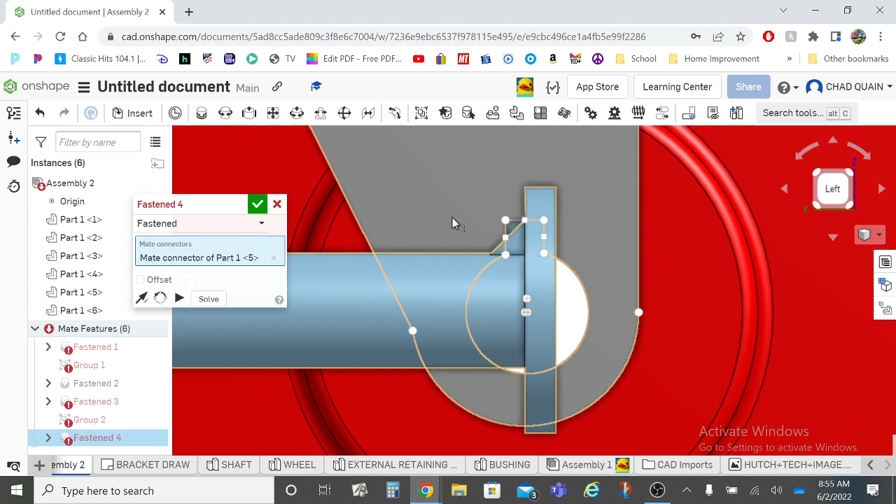If your item is not importing correctly, chances are it's because of the face that it's chosen. Okay, so mine didn't like the face that I picked. So let's just go ahead and put it in here. I tried redoing that. Yeah, that's definitely wrong right there.

So hopefully you guys get a little bit of an idea as to what you need to do in order to get your objects to place correctly. In this case, my orientation is actually flip-flopped completely backwards of where it needs to be, and it's 90 degrees off. So what I could do with this object here is I could use my rotate, not in the fasten command.

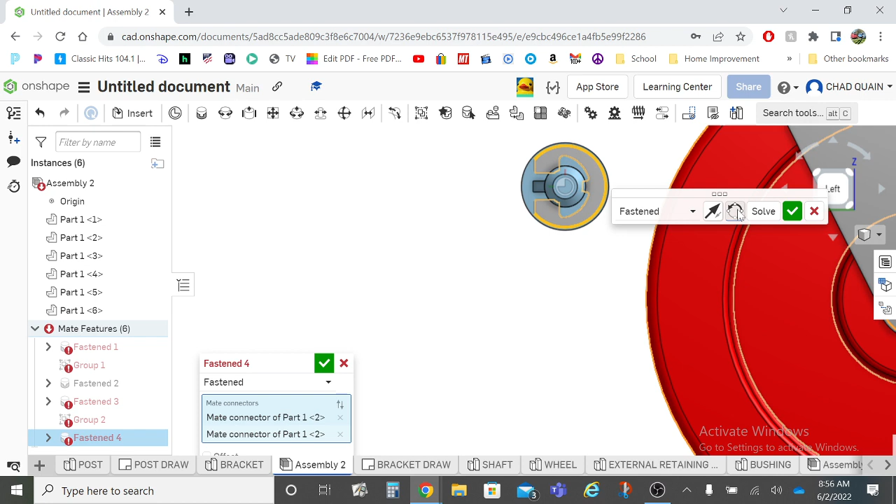Use my rotate right here. Again, I can rotate it 90 degrees. Yes, sir.

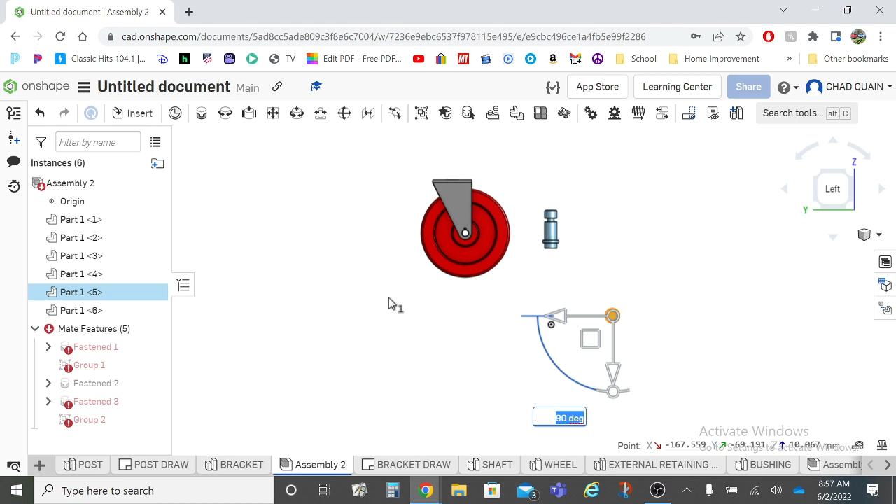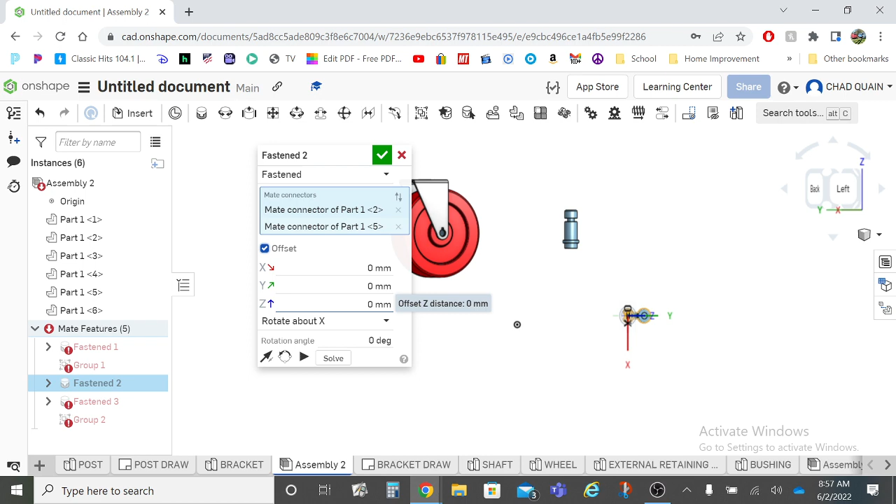Say it one more time. Where I offset it? Yeah, yep. So again, real quick, when I was in that offset, or that fasten, let's see, that would have been fasten 2, I believe, I have the ability to use the offset, and then I would just pick my Z-axis and then negative 1. If it goes the wrong direction, then change it to a positive 1. Okay, you're welcome.